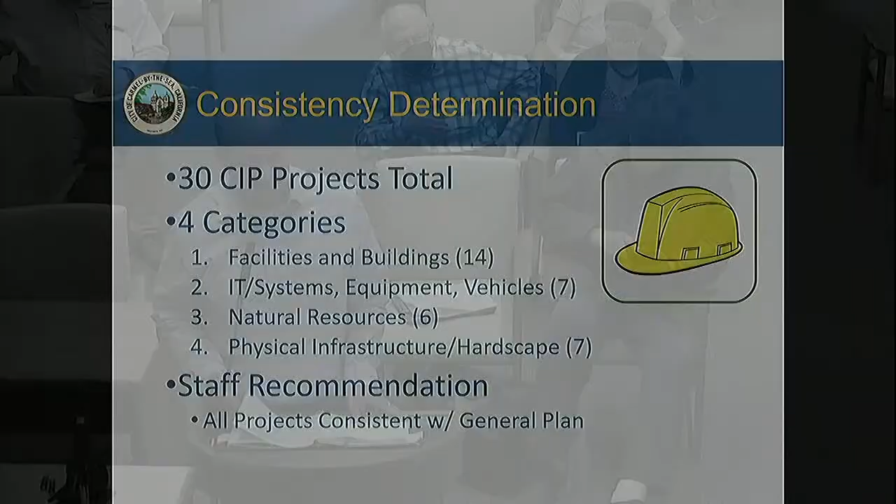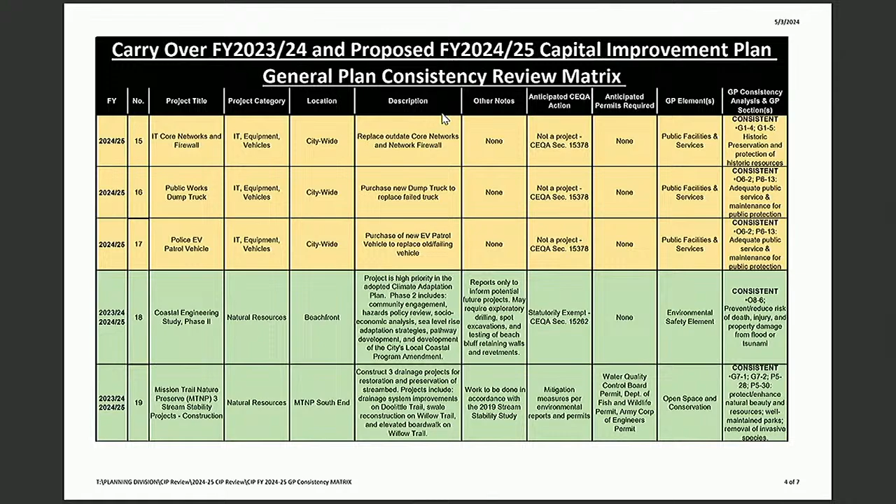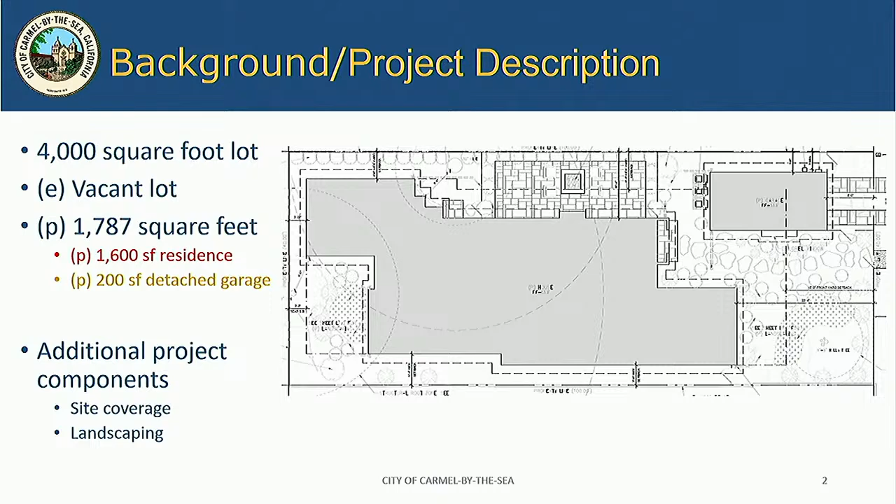The project was originally considered at the March 2024 Planning Commission hearing. That application was continued with direction to the applicant to make some modifications. The primary changes, and I'll go through each one, was the proposed metal roof was changed to a composite wood shake roof. Here we have the originally proposed standing seam metal roof, and the material was changed to a composite shake roof.

That is not a true wood roof, but a composite material that simulates a wood finish. The Monterey pine, which was a hot topic of conversation at the last hearing and was proposed to be removed, has now been proposed to be maintained on site. The building form has maintained primarily the same outline—the red outline was what was previously proposed, so for the majority of the site it has been maintained—and then it has been stepped away where the Monterey pine is now proposed to remain, 6 feet away from the tree.

The proposed tree planting has also been modified. Previously a eucalyptus was proposed, and that tree has been changed to a coast live oak, with the other trees all proposed to remain on site.

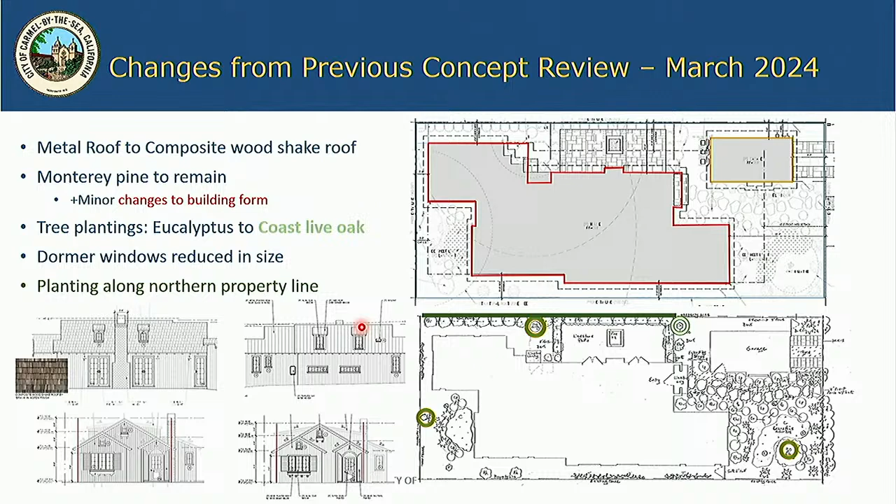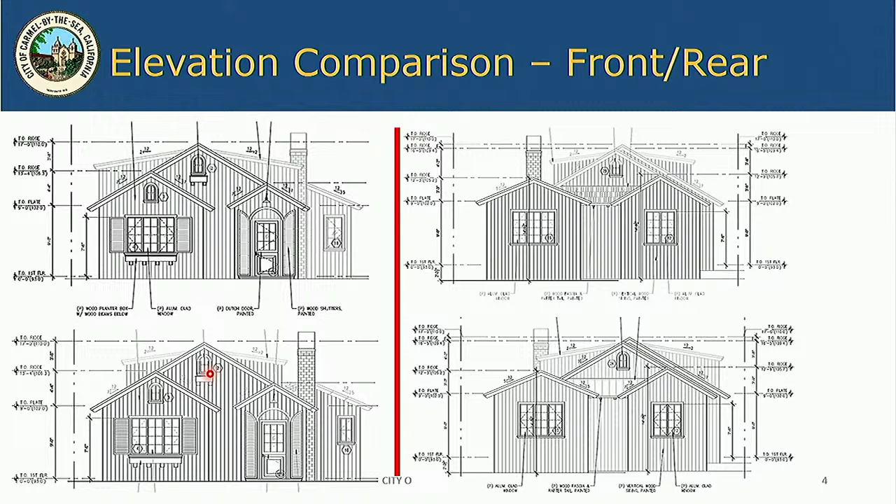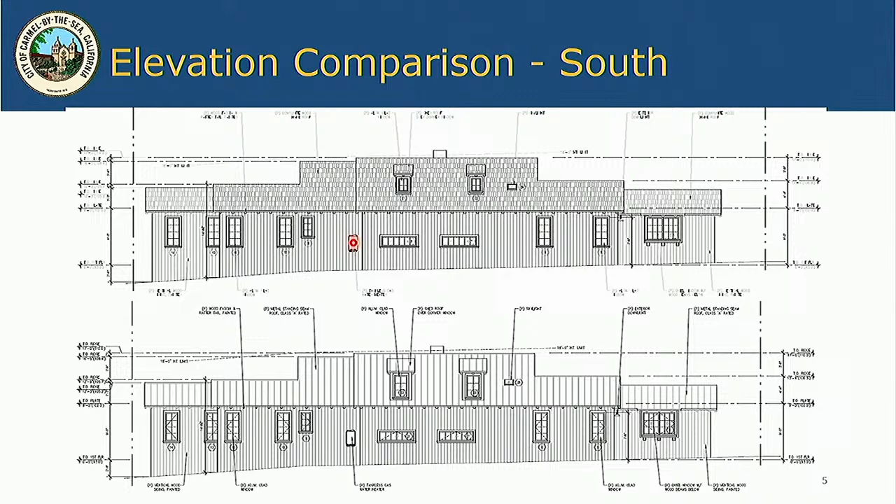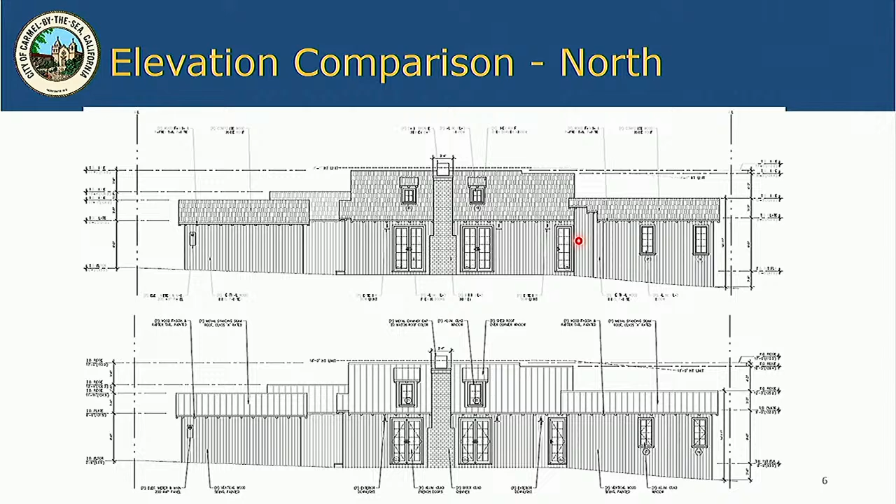Planting along the northern property line has also been included for the benefit of the northern neighbor. We have an additional comparison of the building elevations where you can better see the changes to the dormers. The rear elevation primarily has not changed. Same thing along the south elevation—you can see the changes to the roof material as well as to the dormers. This is the north elevation, facing the neighbor and the pine tree. Mostly the same; dormers have changed, and this is the area where the building form now steps away from the tree.

In respect to the finished details, the applicant is proposing a downlit light, the composite wood shake roof, aluminum clad windows, vertical wood siding painted gray, whitewash veneer, grape stake fencing, solid vertical fence along the side and rear yard, and an impermeable patio—I believe it says sandset, but my understanding is it's mortared—as well as landscaping throughout the entire site.

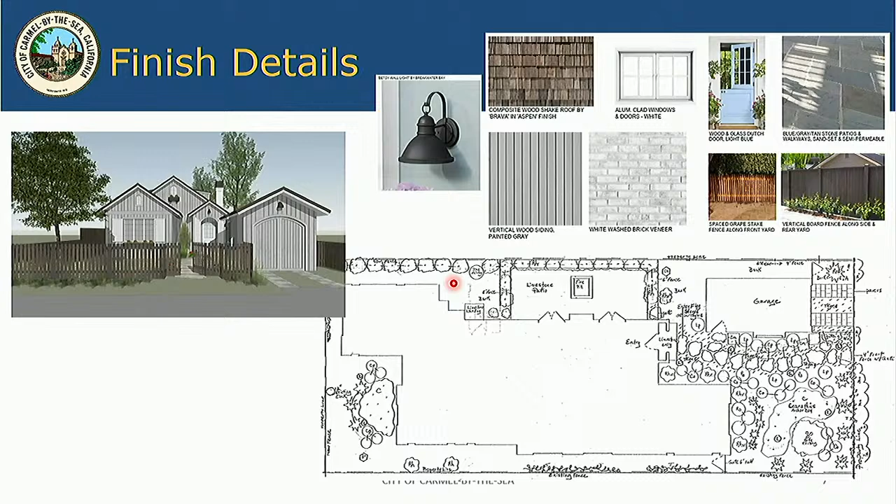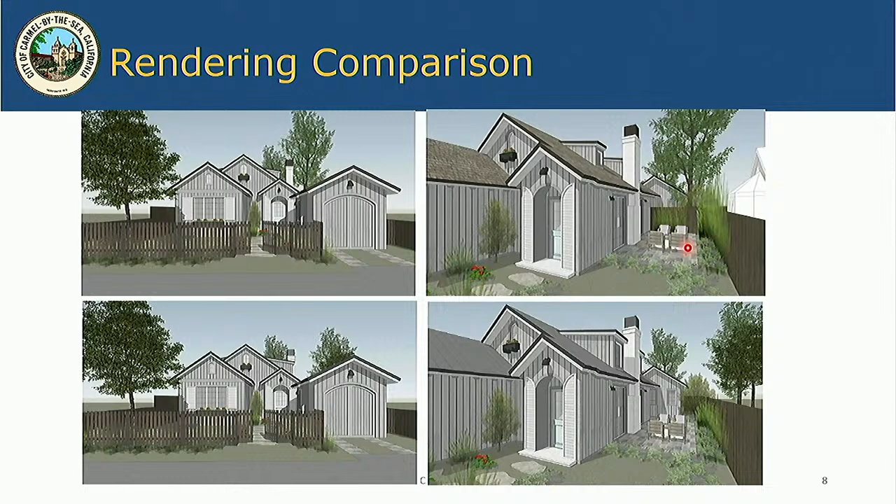We also have a comparison of the renderings, so you can compare the before and after. Again, you have the change to the roof material, the dormers, and then the retention of the tree and the additional landscaping.

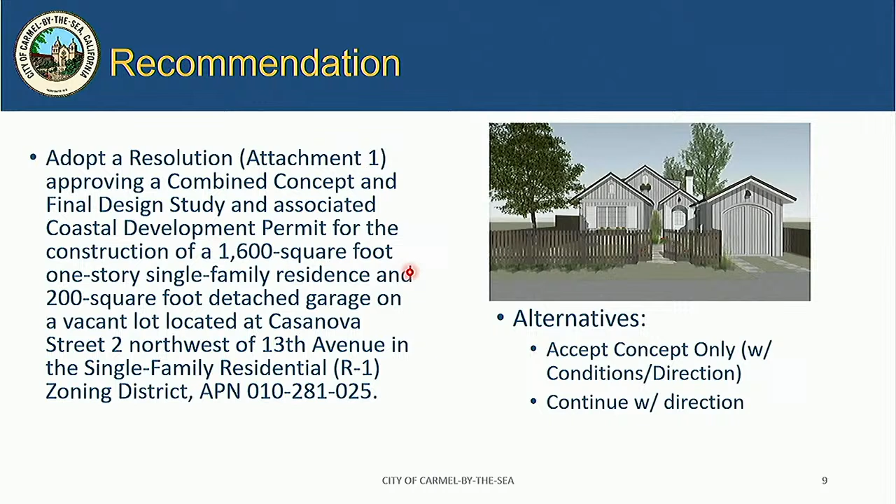So with that, staff is recommending the Planning Commission approve a combined concept and final design study and associated coastal development permit. As alternatives, the Commission can accept a concept only with any applicable conditions or direction to the applicant, or they can continue the project with direction to the applicant for changes. We do have the city forester here if there are any technical questions regarding the pine tree—just want to make that resource available. I don't have any specific questions for him, but he is here should there be questions.

And that concludes my presentation. Thank you. Questions for staff? None here? Okay, thank you.

Good afternoon, I'll be presenting the Schneider project. As background, this is an existing 898 square foot house plus 48 square feet of basement mechanical, totaling 946 square feet. There's also a 170 square foot detached garage, and this is a 5,107 square foot lot located at the southwest corner of Mission and 12th.

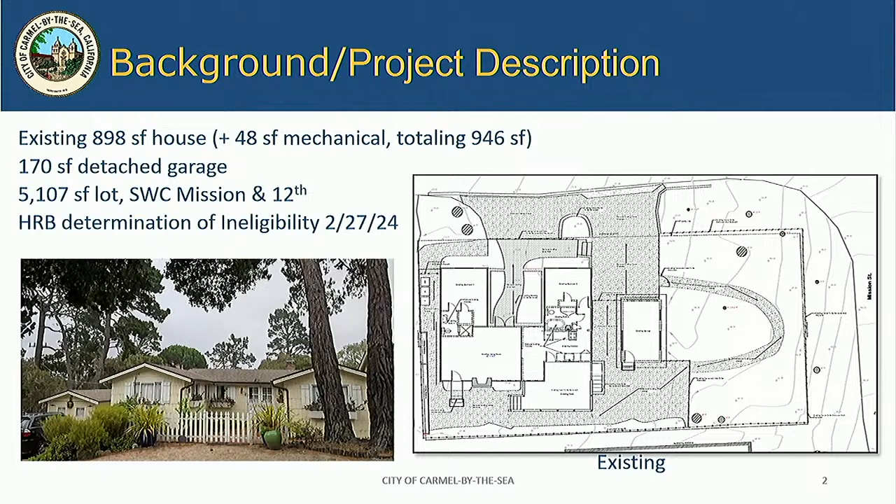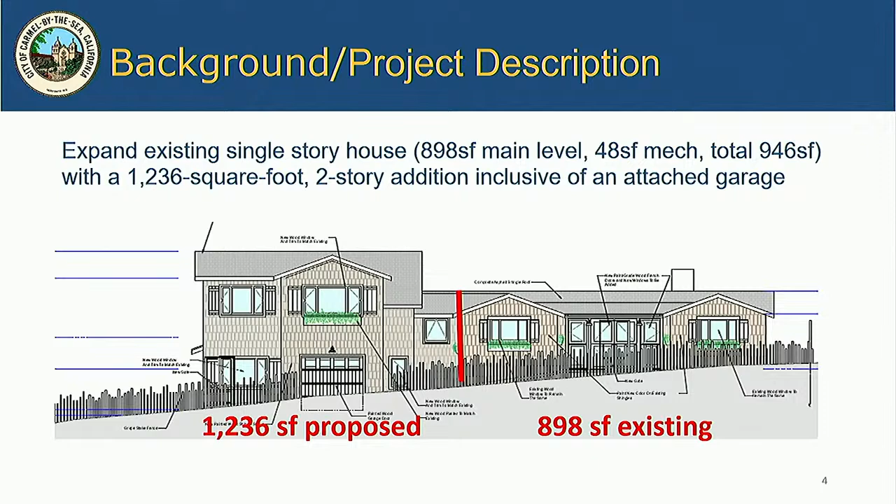In February of 2024, the Historic Resources Board determined that this is not a historic resource. So as part of the project, the detached garage will be demolished, and the existing single-story cottage will be expanded with a 1,236 square foot two-story addition that includes an attached garage.

As mentioned, there's 898 square feet of main level house, plus 48 square feet of basement that's staying. The addition is comprised of 399 square feet at the main level, 278 square feet of garage, and 559 square feet at the upper level. The total floor area is going to be 2,182, under the max allowed.

This project additionally includes an attached accessory dwelling unit. As you know, that ADU is not being discussed tonight, and the floor area figures are not included in the totals. The proposed project also includes a second-story terrace, which is not floor area or site coverage—it's south-facing. The project also includes reconstructing an existing rear deck.

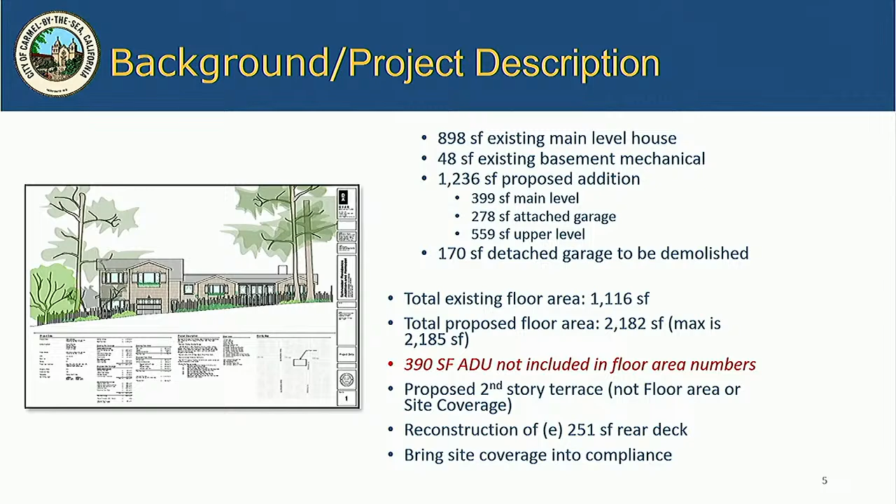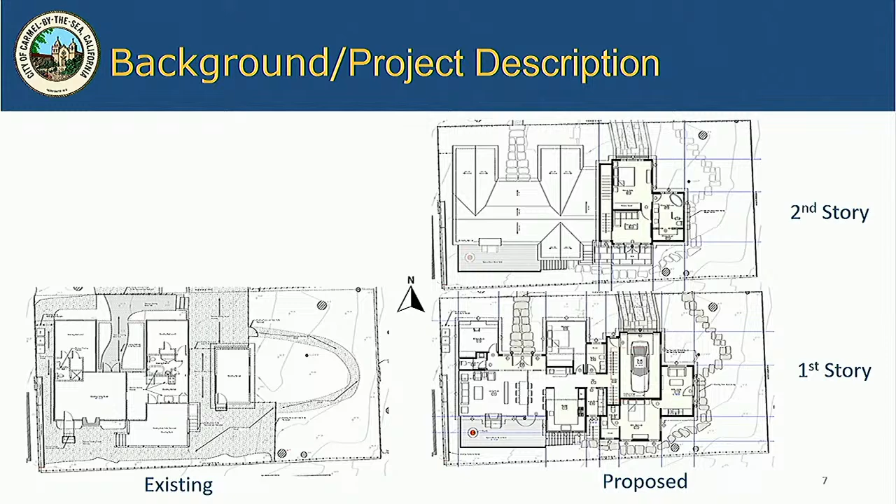Of course, the project also includes bringing the site coverage into compliance. Right now they're over on site coverage, and they're going to bring it into compliance. We can always come back to these numbers if needed. Here are the floor plans—again, an existing single-story cottage going up to two stories. I'll just run through the elevations.

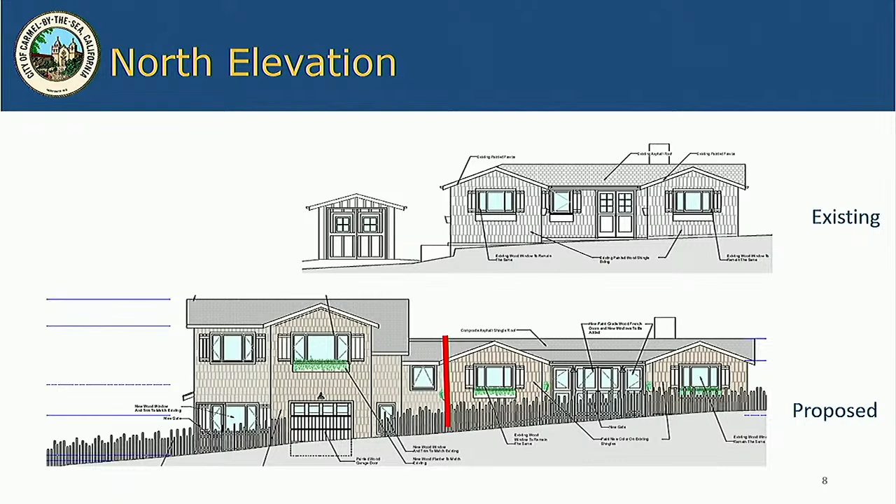The south elevation. As you can see, the glazing on the existing cottage will be changed a bit, and the deck will be expanded and enclosed.

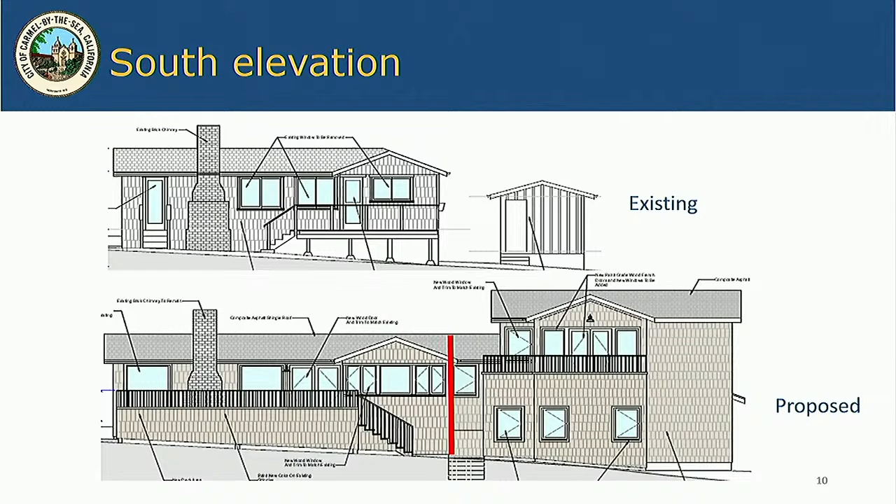Then the west elevation, no changes to the west elevation. You can just see through to that new two-story addition.

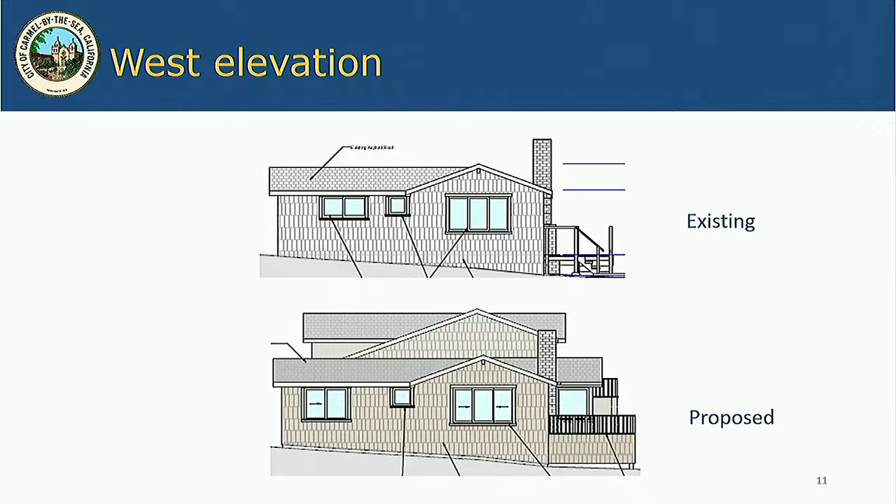So this is a concept hearing. We'll come back for final details.

But in terms of forest character, there's no existing trees proposed for removal. There were already a couple of pines in poor health removed, 2 on the property and 2 in the right-of-way. We're still working with the forester regarding a potential tree replanting, and the forester has already approved 1 limb removal or 1 limb trim.

And all new building structures are set back 6 feet from the significant trees on the site. So standard condition of approval number 2 is going to require a complete landscape plan.

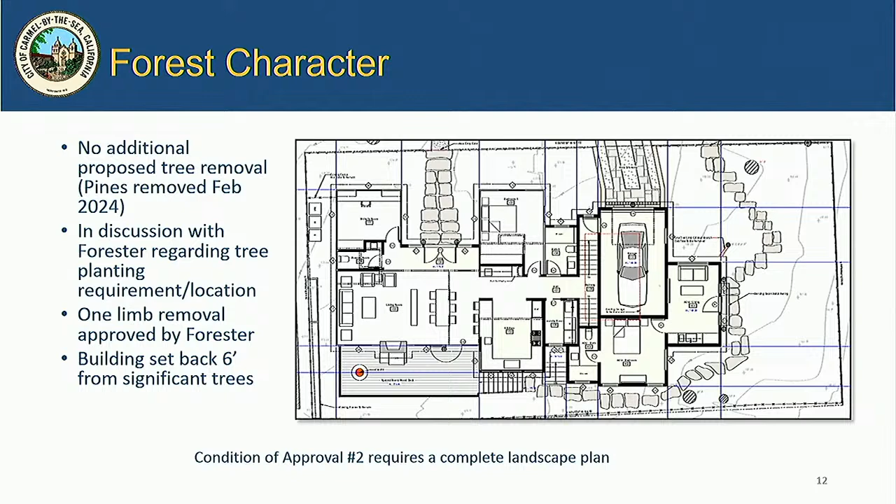For privacy and views, staff has not identified significant privacy or view impacts. There is a tall, solid fence along the south property line, and there is a single-story building to the south. We have received 4 letters of support from neighbors to the south, to the east, and then to the northeast and northwest. But of course, the commission is here and can raise any concerns as appropriate.

Mass and bulk. This is a single-story home going to 2 stories, so there will be a volume study in between the 2 hearings. The addition ridge is well below the 24-foot maximum, and the plate height is as well below the 18-foot maximum, and the pitch is going to match that of the existing home.

So design guideline 7.7, I think, is relevant here. It says locate 2-story elements downhill, except where this would appear dominant or out of scale when viewed from the public right-of-way or a neighboring home. This is a corner lot that does slope downhill to the east, so the applicant has done as requested, and the 2-story element is located downhill.

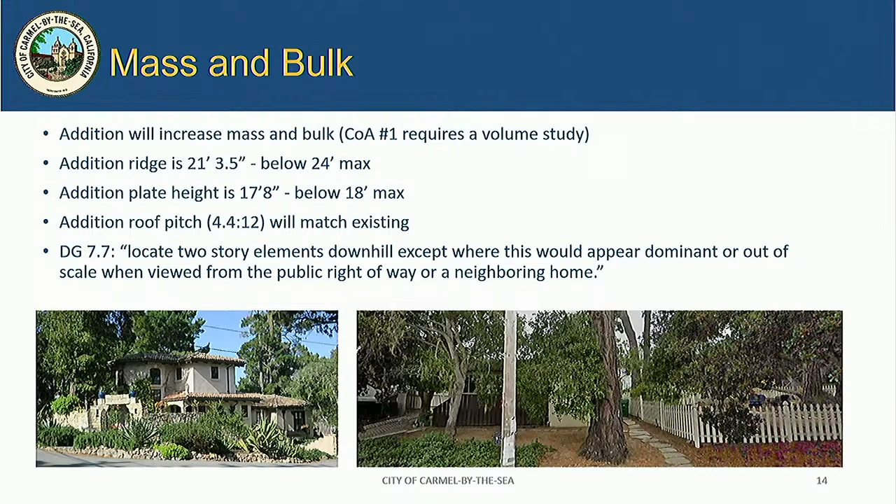You saw the story poles today, and if you have any questions, we can talk about mass and bulk further.

In terms of parking, there is a street-facing garage door, which isn't always recommended, but again, this is a corner lot, so there's really no option to orient it away from the street. And there are very low retaining walls that staff feels do not create a ramp effect, and that garage door along 12th doesn't seem to dominate the house. So staff thought it was an appropriate location of an attached garage.

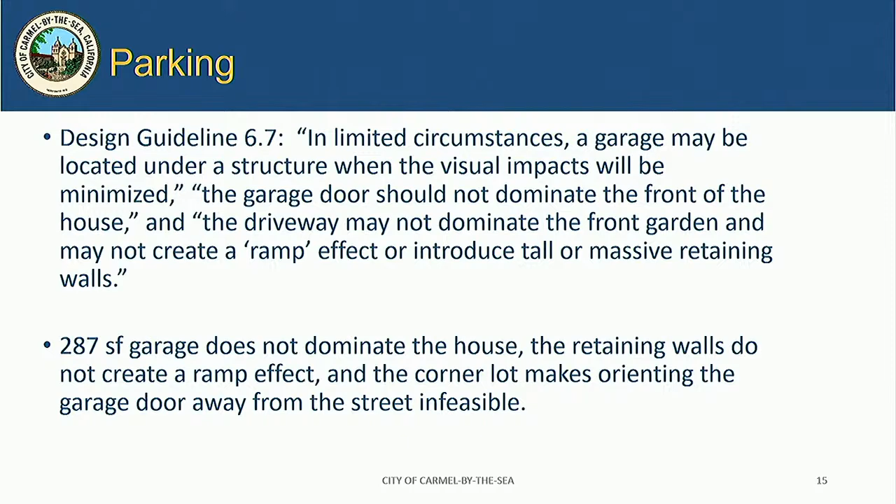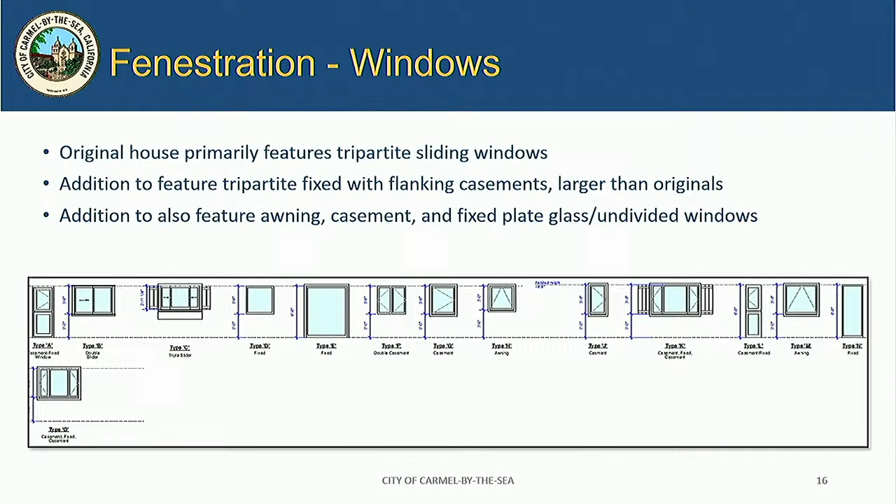Just really quickly, the fenestration. The original cottage features a tripartite style of sliding wood windows, and the addition is also going to feature this tripartite style, but it'll be a fixed central pane with flanking casements, and they'll be a bit larger than on the original home. The addition is also going to feature awning windows and casement windows, and they are going to be plate glass and undivided, especially on the south elevation, undivided light windows.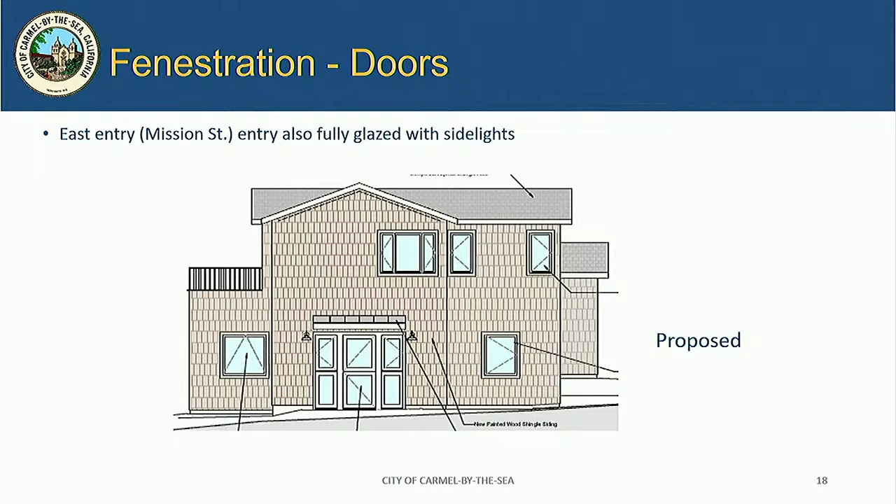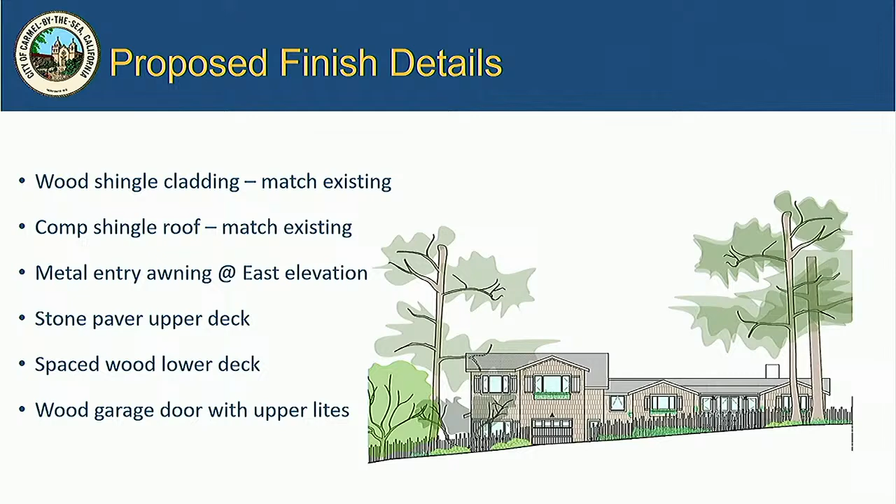As a preview for the finish details, they have provided much of the detail we do require. It's going to be wood shingle cladding to match existing, a comp shingle roof to match existing, a small entry awning at the east, quite small, so that will be metal standing seam. They're proposing a stone-tiled upper deck and then just a reconstructed wood lower deck at the south elevation, and then a wood garage door with narrow upper lights.

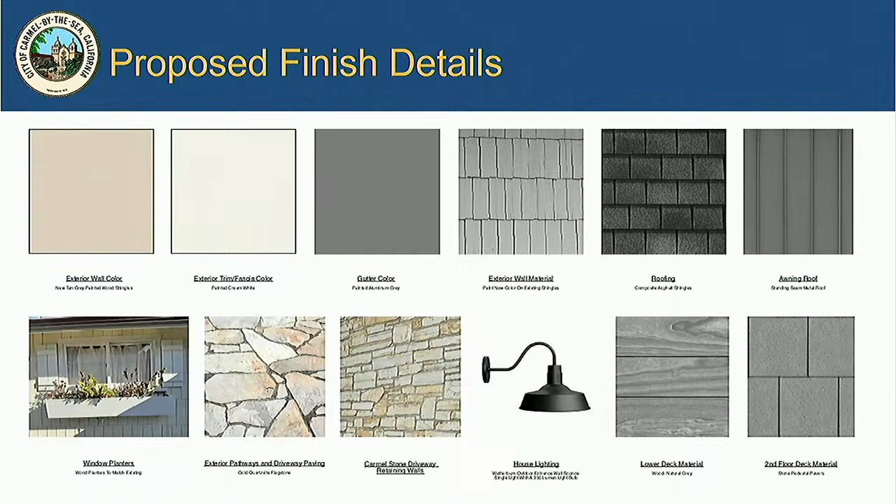Here's our sample board. Colors will be matching and neutral and muted. Staff is supportive of all materials here.

In terms of site coverage, it is quite non-conforming at the moment. There are a lot of gravel, and they are bringing site coverage into compliance down to 684 square feet.

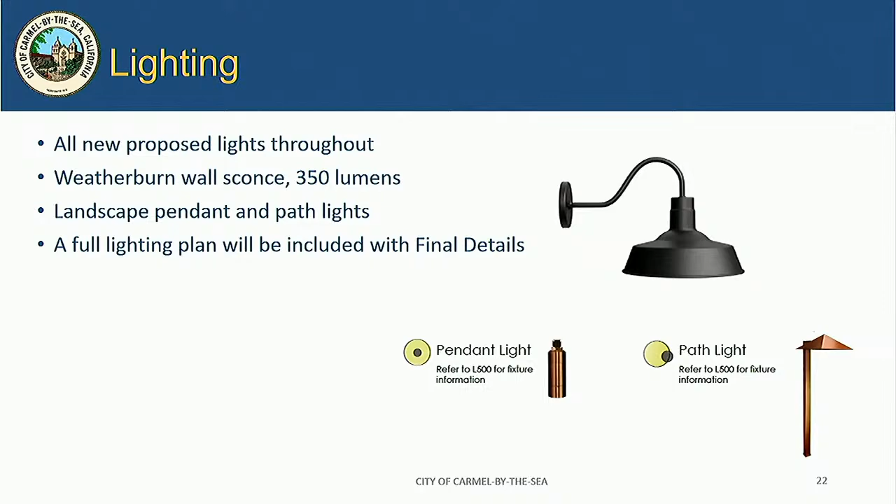The proposed lighting is sufficiently downlit and shielded and meets the lumen level, and the final plan set will include a lighting sheet plan showing locations of all the lights.

So the staff recommendation is to accept this concept design study, and I'm happy to answer any questions that you might have.

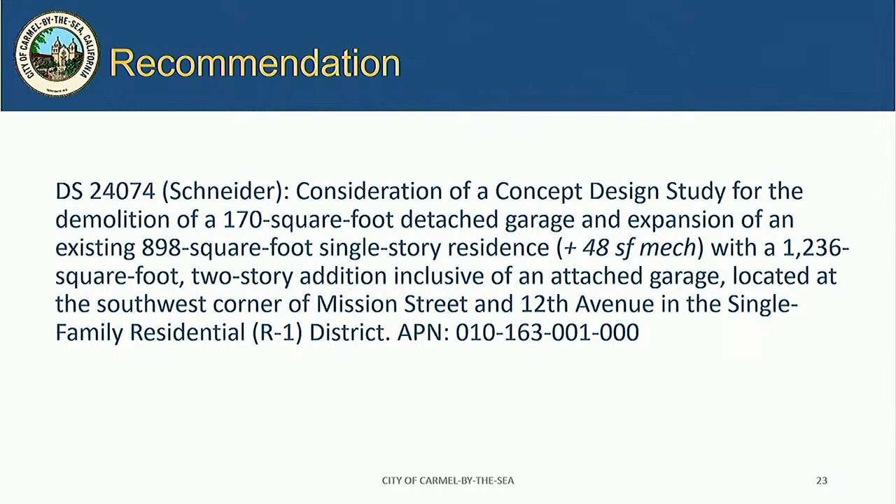Are there any questions for the staff? We also have the architect here with us.

All right, so just to confirm, the house has 35 windows and 2 large glass doors, the proposed house. Is that correct? 35 windows and 2 glass doors? I don't have the window count memorized. That's what the schedule says. There we go, I see 35. Okay, just checking.

Okay, any other questions for staff? Thank you, Catherine. Okay, this time I'd like to invite the architect to come up and make their presentation.

Is that one of them? Yeah, so starting from the west as you walk down 12th Avenue, the addition is setting nicely behind the original and obviously on the lower end. And the second story is such that it's virtually completely screened.

Can you go to the next photo? Virtually completely screened. Oh, is that not... No, I think I sent some in that you attached as a separate attachment to the staff report. These are the angles I included in the attachment. Oh, I should have taken a look.

Well, hopefully when you were there at the site, you had a chance to be at the intersection of Mission and 12th, and basically you can't see the addition at all from there. So by settling it delicately in there, you can see it's virtually unseen from that part of the public right-of-way.

So you may also notice, if we go back to the elevations, the one from the west, you may notice the original cottage is U-shaped with two shallow gables facing 12th, with a low perpendicular slope roof between them.

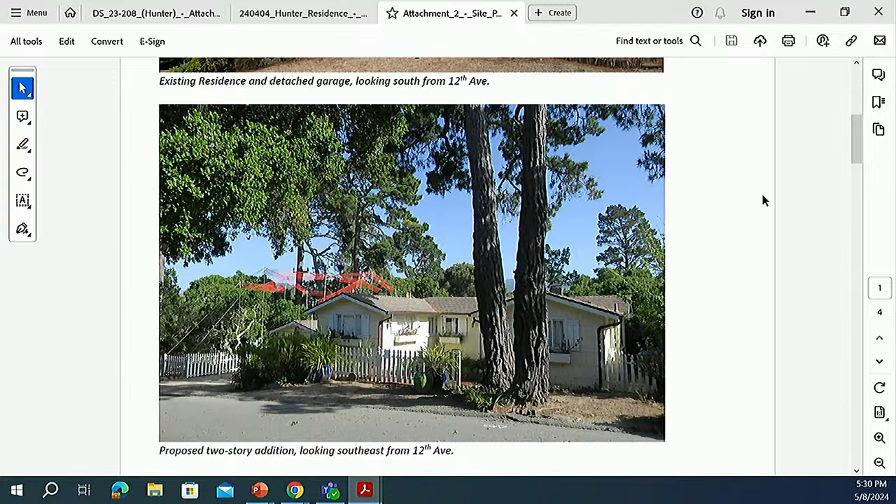I'll also add that in terms of the main existing facade, I don't really consider it composed very nicely, and there's already limited light in the cottage, so we decided to put some nice Dutch doors with side lights across this area. We did this at another project, the Nilsson project, a remodel on Camino Real and 13th, and it turned out great. Because this is so set back, and the entry is not emphasized by its roof form, I really don't see how it could create a sense of grand entry at all, but it does bring really nice, even north light into the space.

In terms of the other fenestration, they're mainly facing areas which are not facing the street and are exposed to a deck which has a parapet and is enclosed to some extent. So with that, I'm happy to answer any questions.

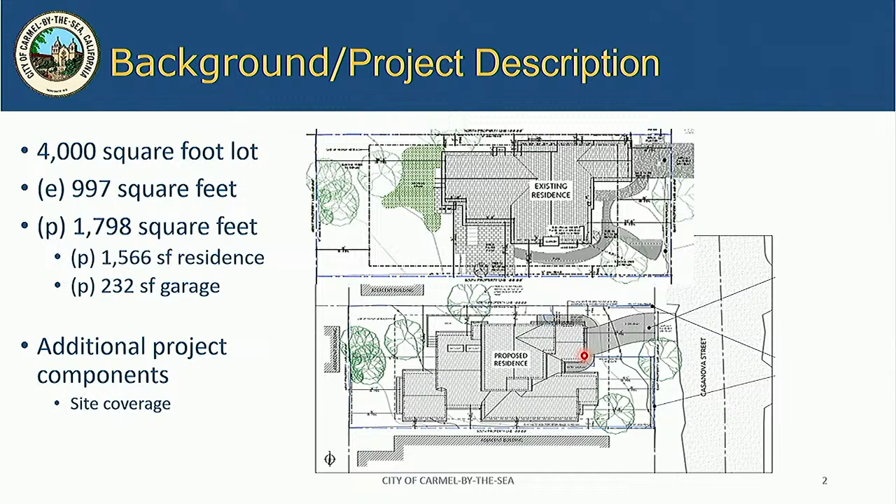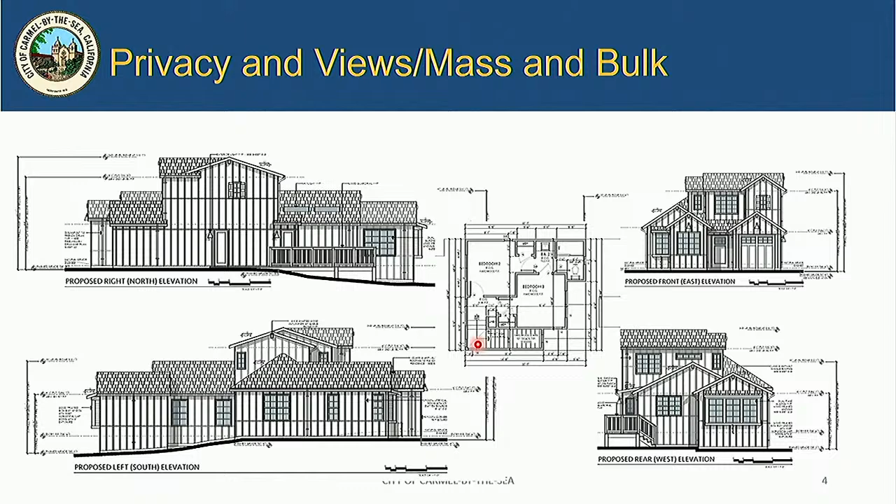This was not explicitly addressed in the staff report, but this is just something to consider. I pointed this out on the site. We also aren't recommending any changes, but it's a point to keep in mind as we consider second-story additions and their placement. The concept design study findings state that the project shall retain a reasonable amount of solar access for neighboring sites, and when considering solar access, excessively tall buildings, particularly those near a northern property line which would block the free passage of sun onto neighboring solar collectors or south-facing windows, should be avoided.

So this property is located more closely to the northern property line. It is set back 6 feet 6 inches from the property line and about 16 feet 8 inches from the adjacent building. Based on the site context, we have not recommended any modifications to the project in the staff report or currently at the hearing, and based on the story poles, we feel that the massing is appropriate. We just want to bring this to the Planning Commission's attention, as something to keep in mind as we consider these second-story additions and their placement.

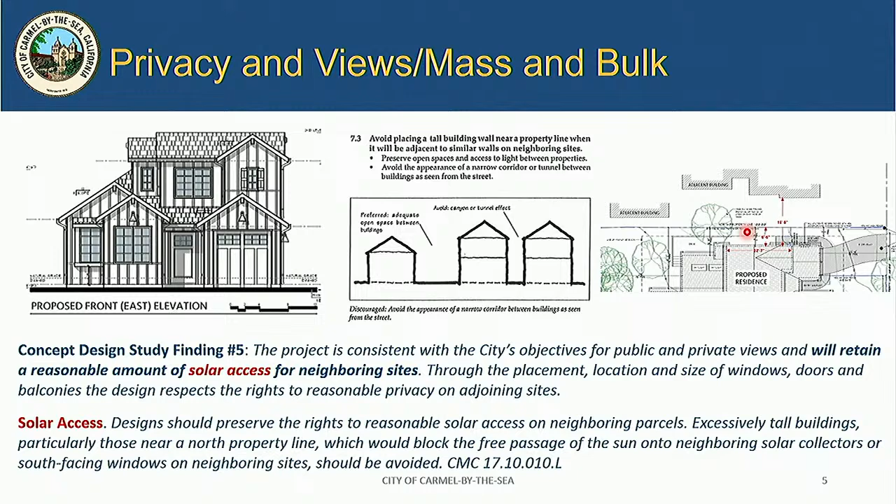In terms of the building and roof form, the building is a bit complex in its form, but as you saw on the site today, there are a number of trees on site proposed to remain. The applicant is proposing to remove 2 non-significant acacias to accommodate the development, but there are a handful of oaks on site that are proposed to remain: that large grove in the rear, as well as the neighboring tree growing over the top of the addition, and some trees in the front of the property.

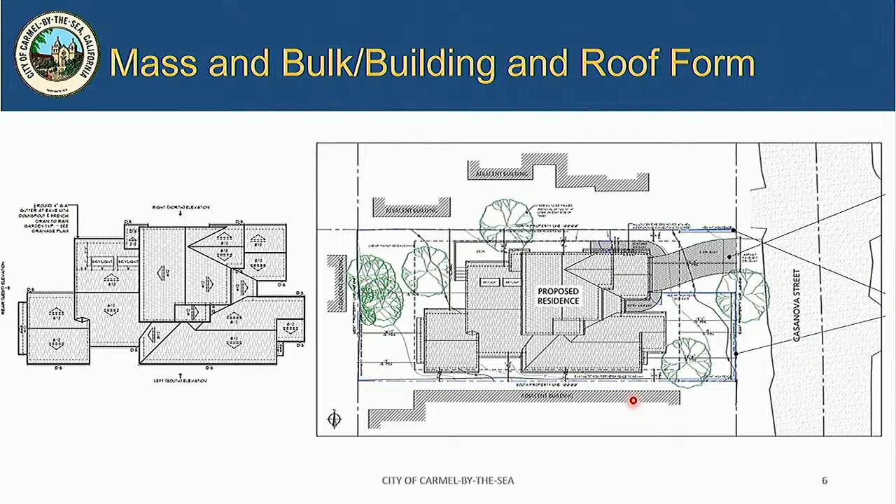The roof pitches vary throughout the site, between 4 and 12, 6 and 12, and 8 and 12, which you can see in the elevation and rendering. So the Planning Commission could consider whether those roof forms should be simplified or made consistent throughout. That is not one of the considerations for final details review.

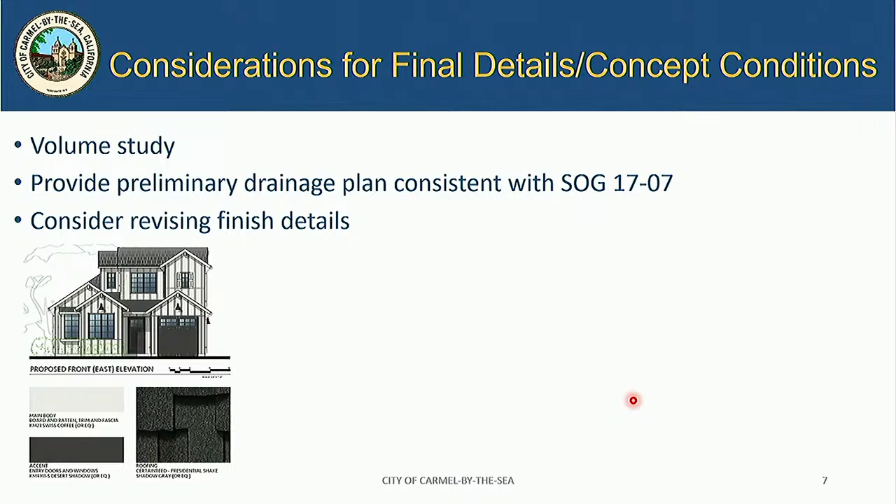In the resolution, we have that standard condition for the volume study to provide a preliminary drainage plan consistent with our drainage standard operating guidance document. One was provided, however it did not meet the applicable setback requirements, and then to consider revisions to the finished details, particularly regarding the color scheme. With that, staff recommends the Planning Commission adopt a resolution accepting the concept design study as described on the screen, and that concludes my presentation.

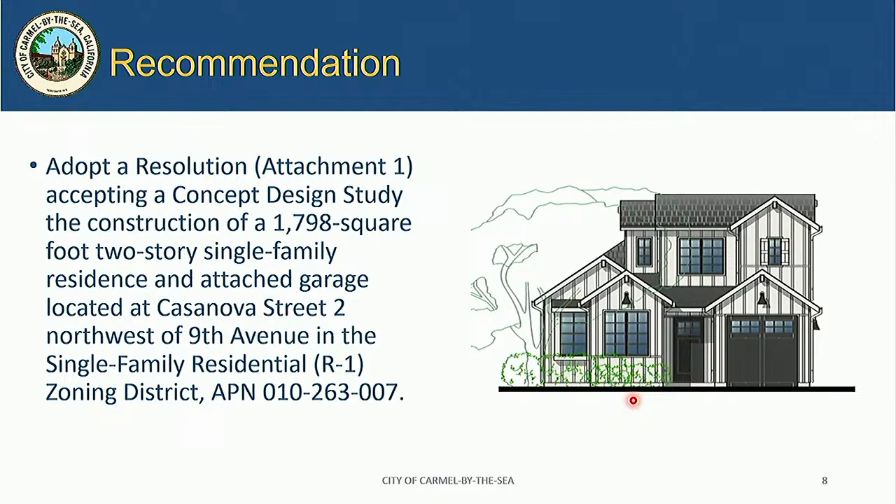I'm happy to answer any questions. Questions for staff? None here? No. Okay, thank you, Evan. I'd like to invite the designer to come forward and make their presentation.

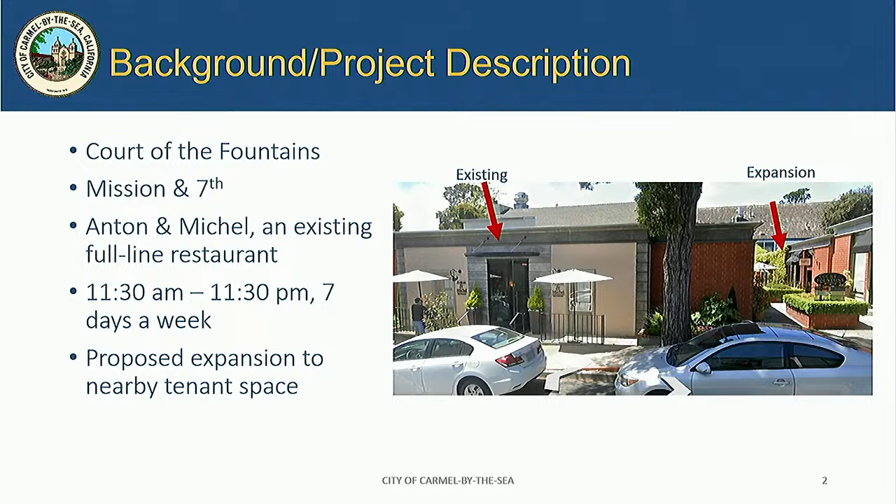So this space is not physically attached to the existing restaurant, but is within the courtyard. The existing restaurant has about 100 seats. The proposed expansion area would have 27 seats for a total of 128 indoor seats. They currently have outdoor seating within the interior courtyard, and no changes are proposed to the outdoor seats. Their existing use permit does allow them to have 130 interior seats, and they would remain within that.

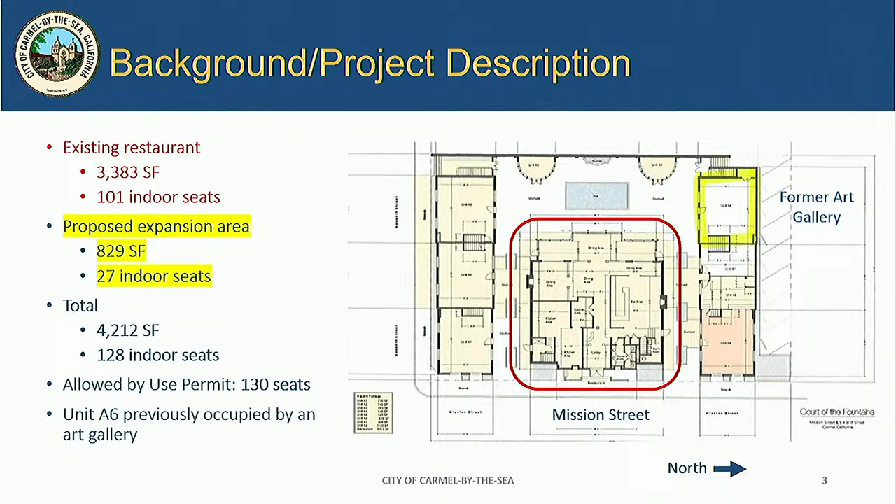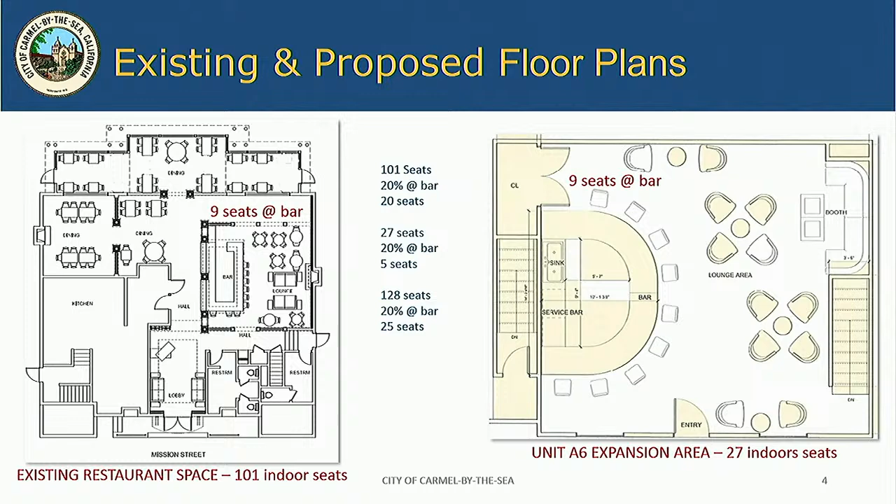The code has, here's the next slide. The code does talk about the number of seats that you can have at a bar. When we did our analysis for the restaurant, we looked at both spaces combined. If the commission finds that it's more appropriate to consider them independently, there would be a reduction in seats at the bar in the expansion area. However, if you find that it's appropriate to look at it as a cohesive whole, the project does comply.

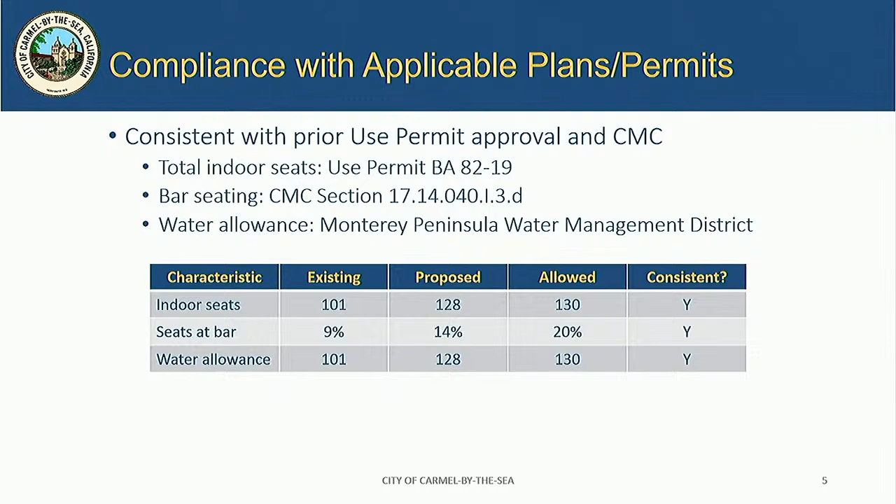Also, we did verify with the Water Management District that there is sufficient water credits for this restaurant. And with that, we are recommending that you adopt a resolution approving the use permit for the expansion. That concludes my presentation.

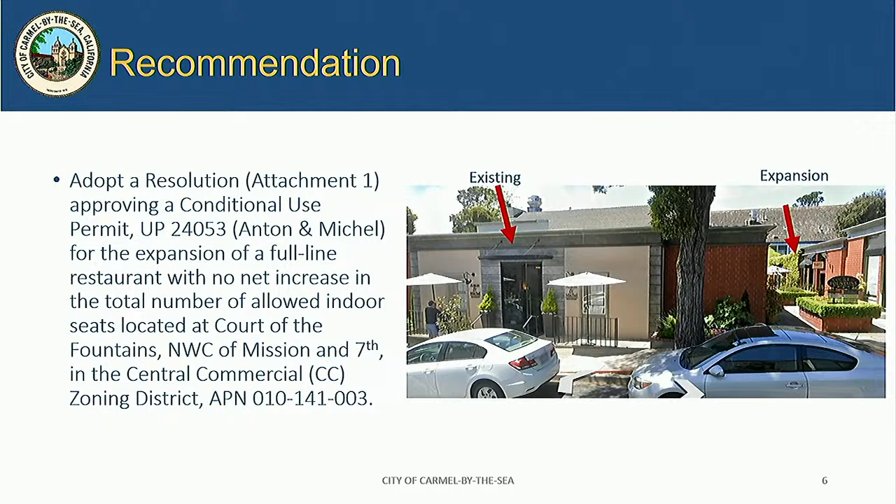I'm not sure if the applicant is able to be in attendance. They did mention at the tour that they were very busy at the restaurant. So I'm happy to answer any questions, and we'll certainly do the best that I can.

I had a question. They're going to be serving food in there? Yes, they'll be serving a full menu. This is not a dedicated bar. This is part of the dining area. It has the appearance of a bar, and it's separate from the restaurant. So I want to make sure that's part of the use permit.

Okay, any other questions for staff? All right, so are maybe the applicants online? Is there nobody representing them? Would anybody like to represent? No one online? No, sir. Okay.

In that case, I'm going to close the public hearing and open it up to the commissioners. Anybody? Jump in.

My only comment would be, I think we should look at this as, how did Marnie put it? Now that I think I just lost my note. Leaving the seating as proposed, I think that's fine. And I would actually go forward and move adoption of the resolution and approval of the use permit at this point as proposed by staff.

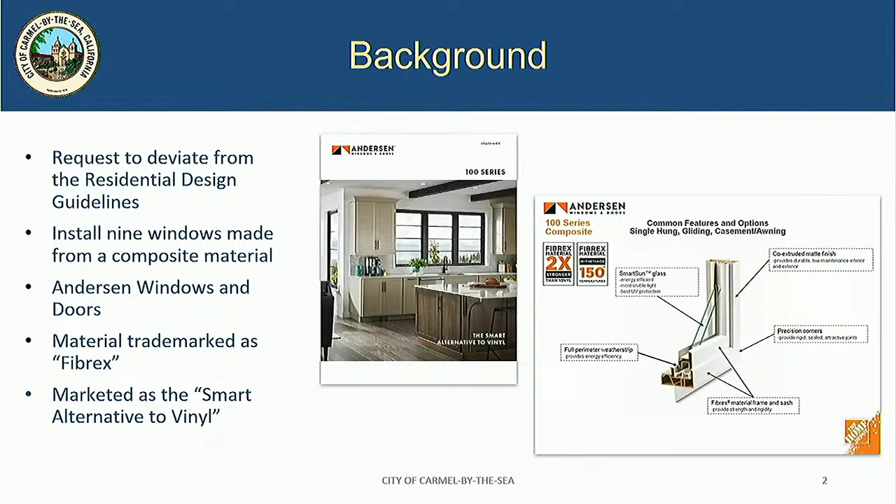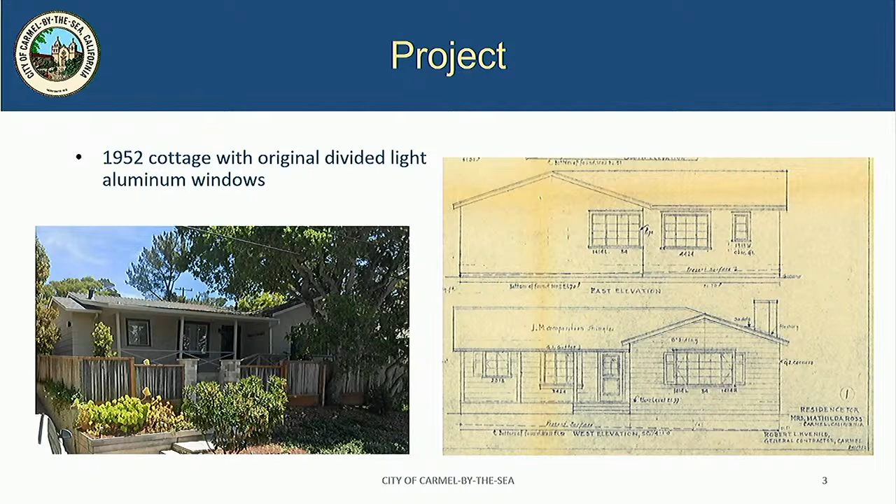The cottage is a 1952 cottage that contains the original divided light aluminum windows. They are proposing to replace all of the windows so they would remain consistent throughout the cottage. Residential Design Guideline 9.11 talks about window styles and materials being consistent with the architecture and uniform throughout a building. The third bullet down talks about materials other than authentic unclad wood being appropriate only when it can be demonstrated that the material is more appropriate to the architecture.

I will note that a couple years ago, the Planning Commission did make a decision that aluminum-clad wood windows that have the appearance of authentic wood windows were an appropriate alternative, and we have been implementing that direction for a number of years now.

The difference between these two samples, both from Andersen: one is a wood window clad with the Fibrex material, the other is just the Fibrex material, and that's what's being proposed for this residence. So that's the Fibrex, the 100 series, clad with Fibrex. Correct.

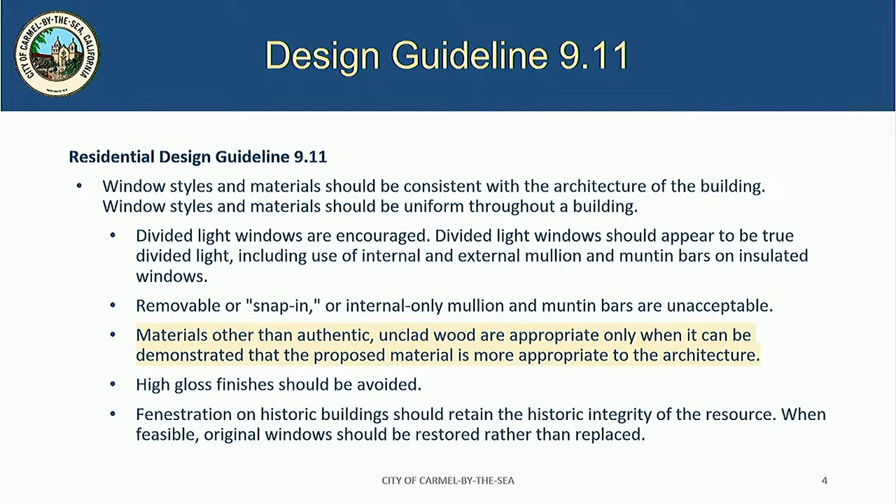They look kind of different. I'm looking at the cladding on this one, it looks kind of like it has some fibers, but it's hard to tell.

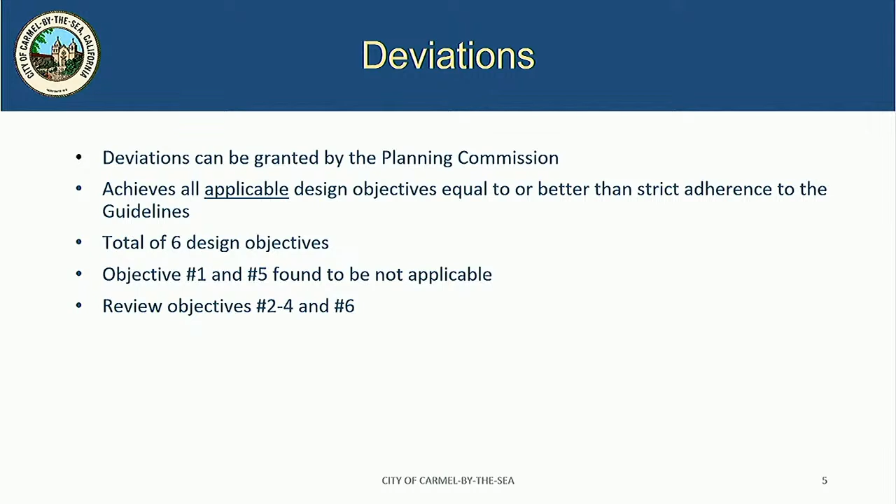The zoning code does allow the Planning Commission to deviate from the residential design guidelines if the deviation achieves the applicable design objectives equal to or better than strict adherence. There are a total of 6 design objectives. We went through each one in the staff report, so I won't repeat them in detail, but we did find 2 of the objectives not applicable. I'll run through the other 4 for your consideration.

The next objective is encouraging innovative design. The Planning Commission might consider whether this Fibrex material is innovative. It's an environmentally responsible material composed of 40% reclaimed wood fiber, which they indicate comes mostly from manufacturing Andersen wood windows. In that respect, you could find this material consistent with design objective number 3.

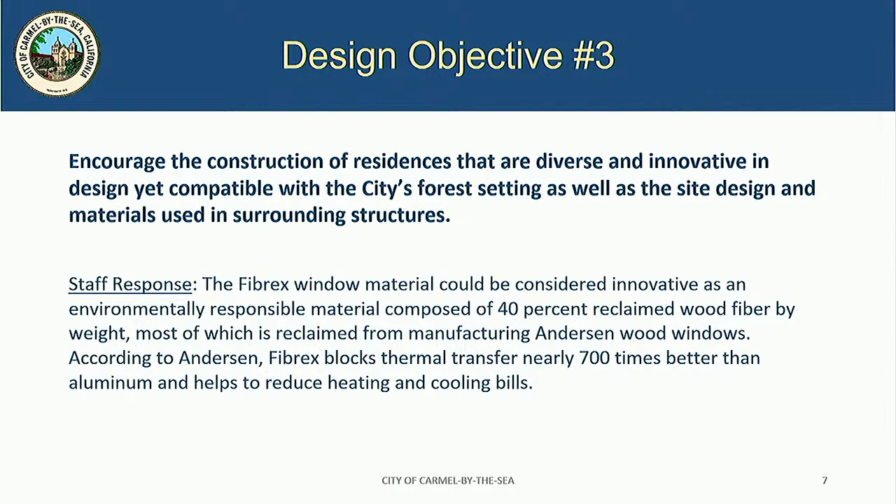The next one is promoting design that respects privacy. Again, there's no changes in the original window openings. An existing obscure glass window in a bathroom would remain obscured. So you could find this consistent with objective number 4.

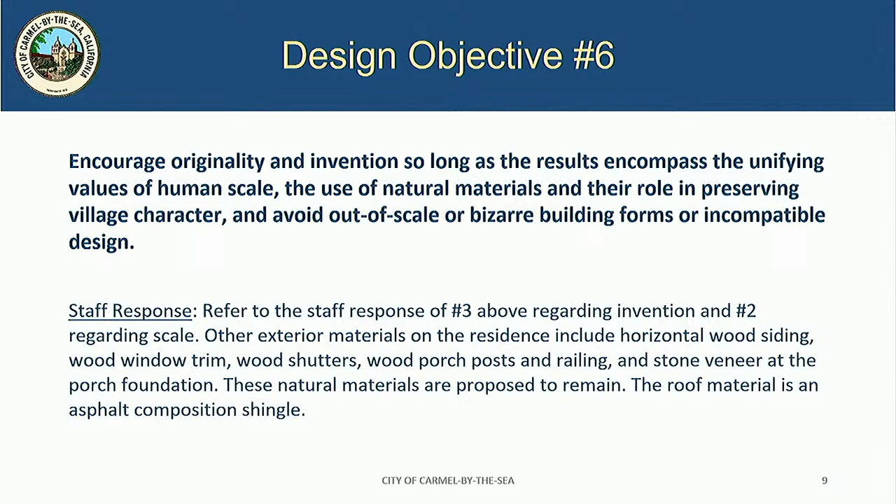The final objective is encouraging originality and invention, which overlaps a little with objectives 2 and 3. I'd also note that other exterior materials on the residence include wood siding, wood trim, wood shutters, wood porch posts and railings, as well as some stone veneer added more recently. So there still are a lot of natural materials within this cottage, just something to consider.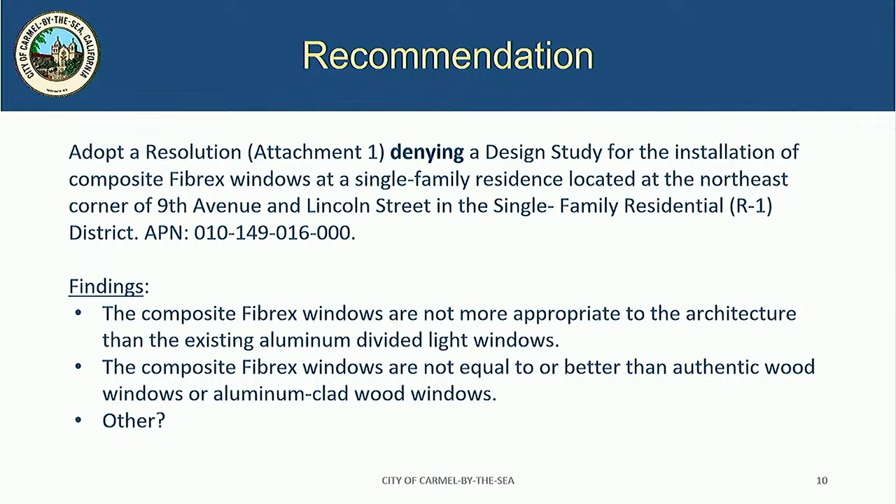We are giving you two options this afternoon. One option would be to deny the material, finding that it's not more appropriate to the architecture, or that it's not equal to or better than authentic wood windows or aluminum clad wood windows. You could certainly make other findings as well. The alternative would be to adopt a resolution approving this particular window material, and I've outlined the findings for an approval.

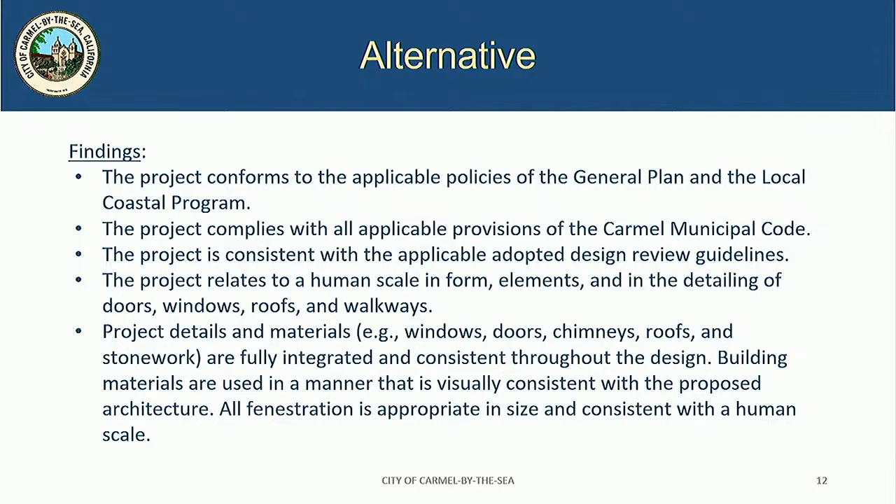I did not have an opportunity to discuss with the applicant or the owners whether this 400 series window would be of consideration. It might be worth asking them, if the commission's not supportive of the 100 series, whether you would be supportive of the 400 series, even though the cladding is Fibrex and not aluminum. With that, I'll end my presentation. The owners and the applicant are here this evening, and I'm available to answer any questions.

Questions for staff? Just to clarify, is the proposal the 100 or the 400? It's the 100, this one. Are they changing any size of the windows? Correct, no. Are they going to be the same configuration with the divided lights, or what are they proposing?

I'll need to double check that. Okay, well, we'll get to you as soon as you do your presentation. I'm just seeing if staff has some answers. Let me pull up the plans.

All right, why don't you make a presentation? Is that all right, or you want to? Yeah, oh, you're right there, or what? You want to do it now? You can do whatever you want. Choices. Go ahead, start your presentation.

Hi, I'm John Bellinger, I work for Home Depot. I'm the applicant for the Schneiders and doing the installation. Andersen windows are wood windows that have been around for many years. We do Fibrex, their new proposed windows. We have approval to do these windows for historical preservations in Monterey, Pacific Grove, Pebble Beach, Monterey County as a whole, and we even got permission for San Francisco. It allows that natural look and feel of real wood windows and the ability to paint and stain if need be.